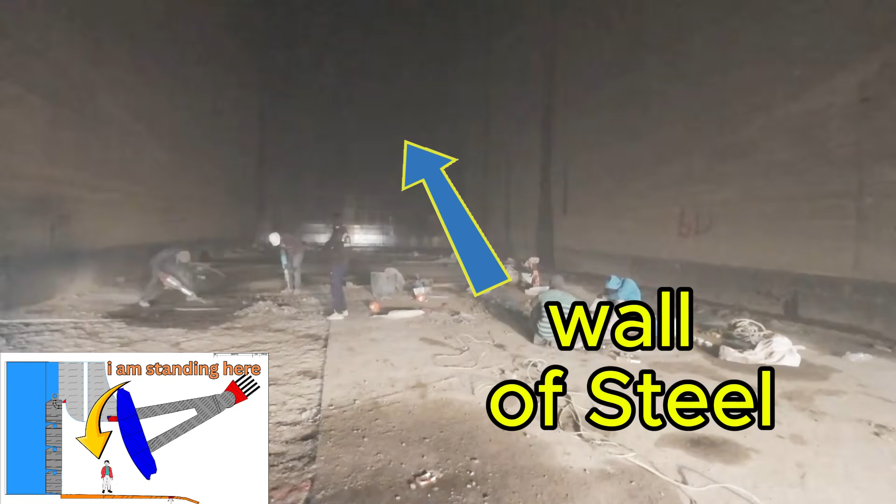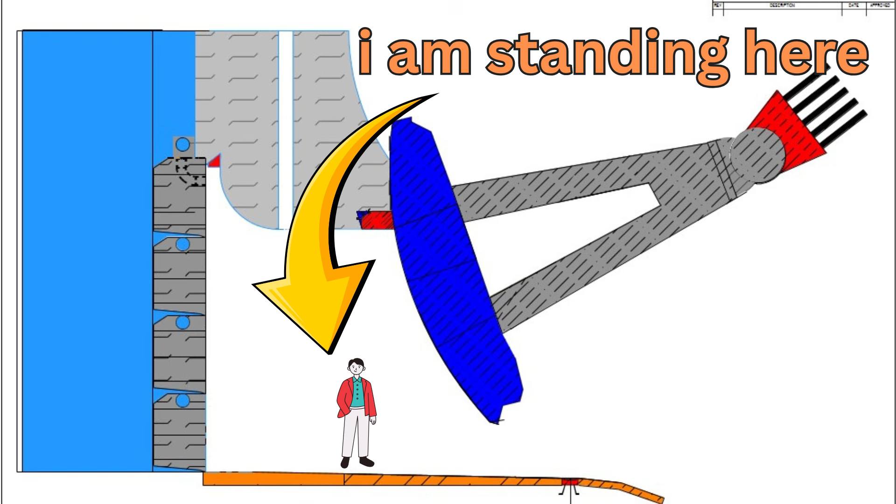Right now, this wall of steel is the only thing stopping millions of tons of water from crushing me. And if this wall fails, there will be no escape from here. I'm standing inside an area engineers intentionally designed to perform repair and maintenance on this massive gate.

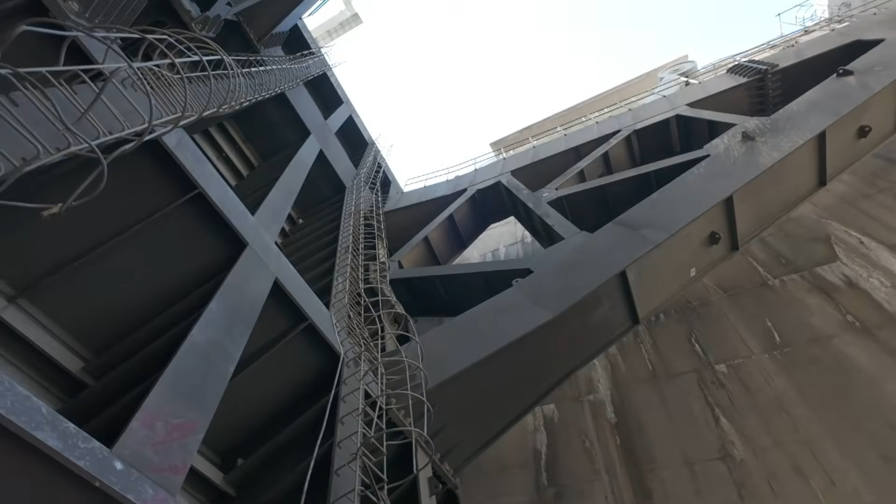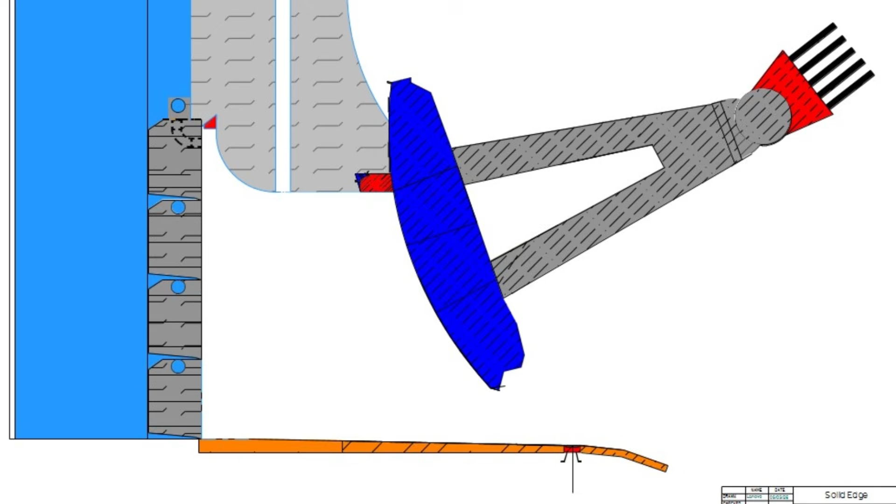While millions of tons of reservoir water press against a steel wall just meters away. Stick around until the end because you will see why, after installing these stop logs, engineers must open the radial gate just slightly to drain this area and prevent a dangerous vacuum from forming. During removal, the crane operator lifts only 10 millimeters first and then waits to fill this area before removal of the stop logs. Later in the video, I will explain the consequences of vacuum pressure.

These joined steel barriers are called stop logs. As you saw in my previous video, they are installed in front of the spillway gate whenever maintenance is required.

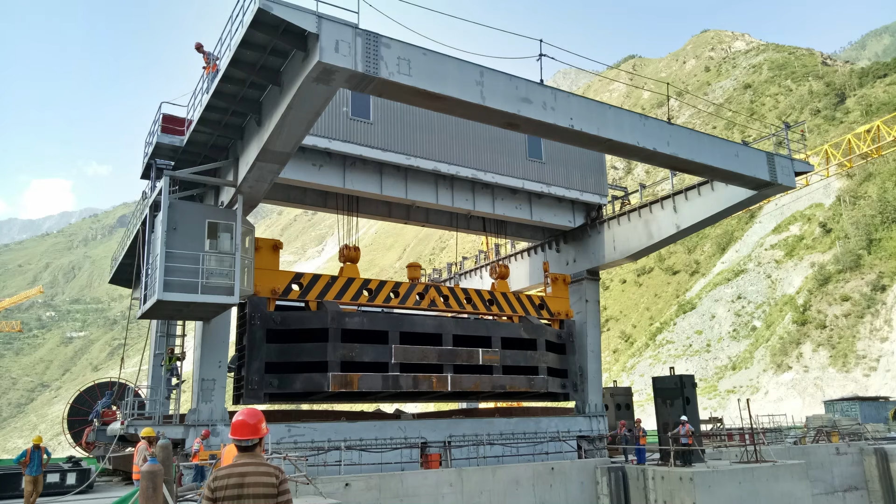So this is a picture I took during the commissioning of the stop log, just to give you an idea of how they move and sit in the slot.

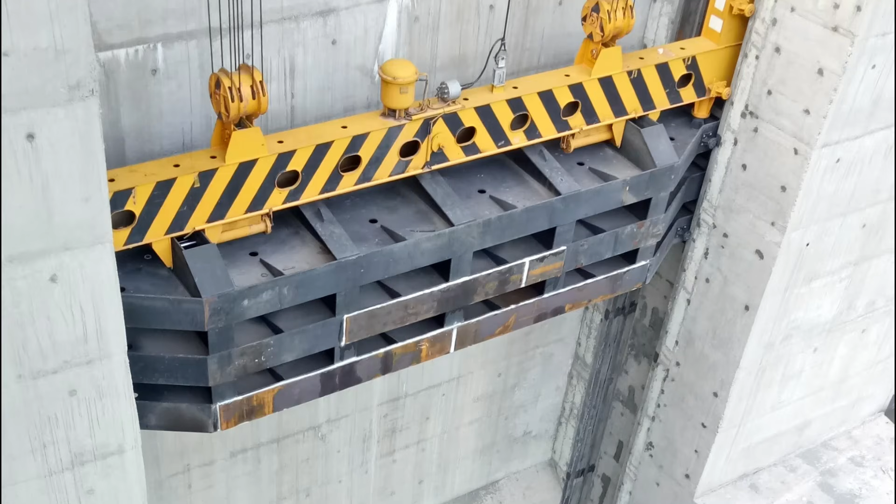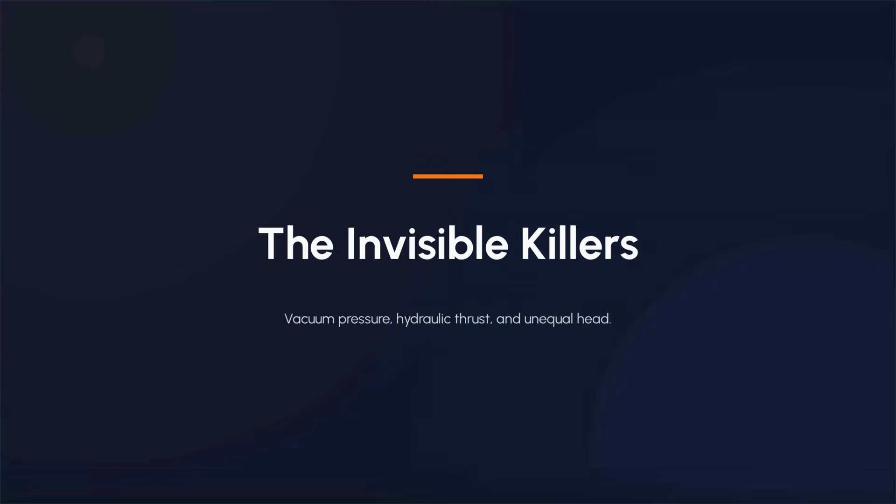At first, the process looks very simple: lower the steel sections, drain the area, do the repair. But in reality, there are invisible forces constantly trying to destroy everything. By invisible forces, I mean vacuum pressure, unequal water pressure, and hydraulic forces powerful enough to crush these massive steel sections like a soda can, or even damage the radial gate.

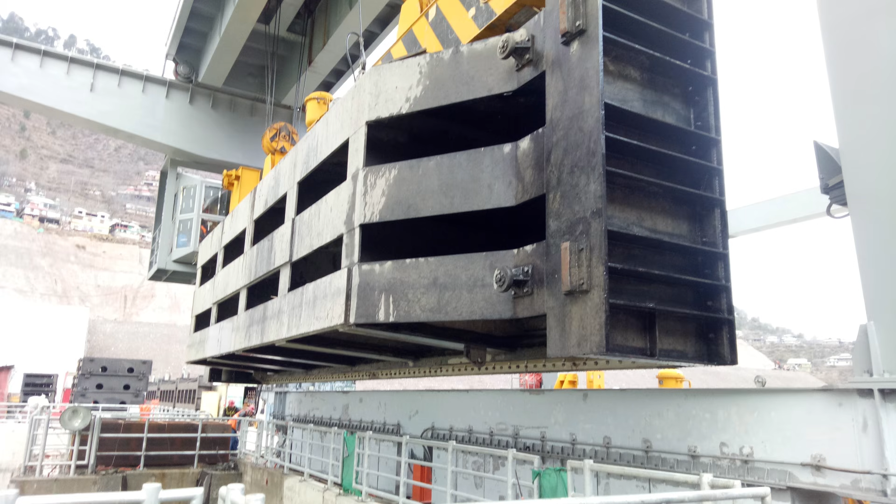If the process is not performed carefully, let me show you why. These massive stop log sections, each weighing nearly 60 tons, are lowered one by one into a narrow slot upstream of the gate. Once they are stacked, their rubber seals create a watertight barrier, and interestingly, the pressure of the reservoir actually helps compress the seal tighter against the steel.

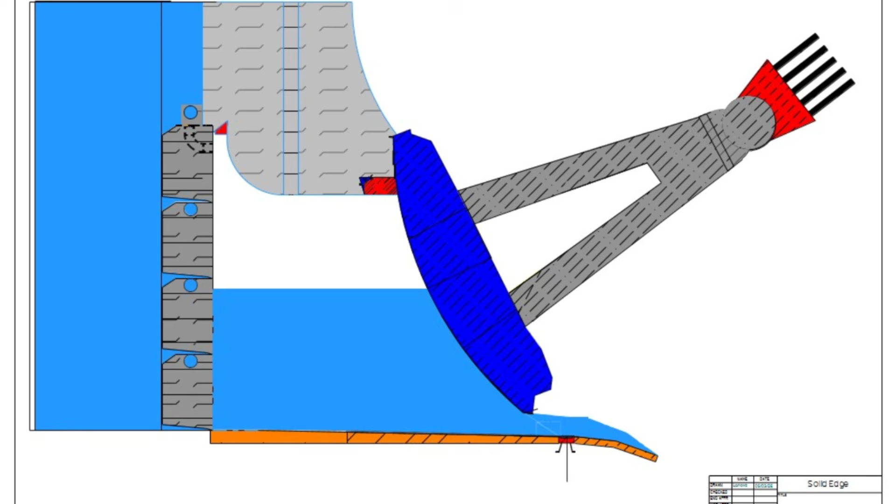But now comes the dangerous part: removing the water trapped between the stop logs and the gate. Because if engineers simply open the gate and drain the area too quickly, a vacuum could form inside this empty space, and that pressure difference can become incredibly powerful, strong enough to deform or damage the stop logs themselves.

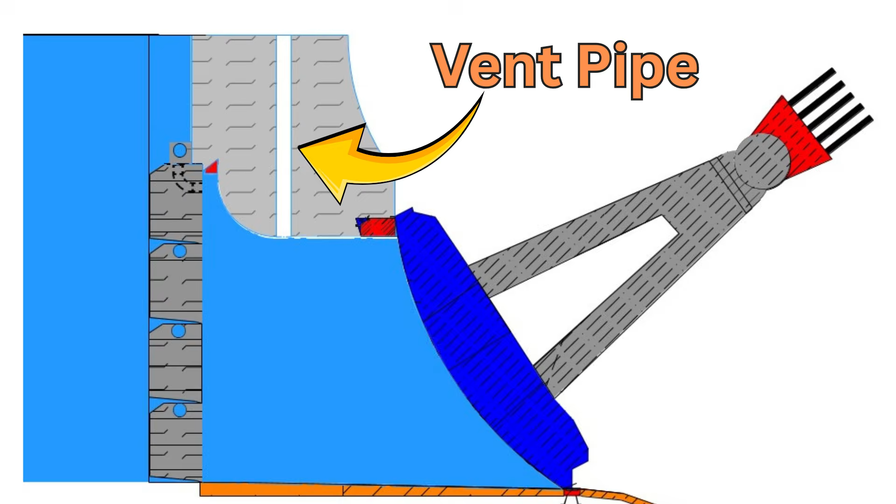To overcome this issue, a special aeration or vent pipe is connected to this chamber, as I have shown in the diagram. Once the operator slightly opens the radial gate, water slowly drains out while air enters through this vent pipe to replace the empty space.

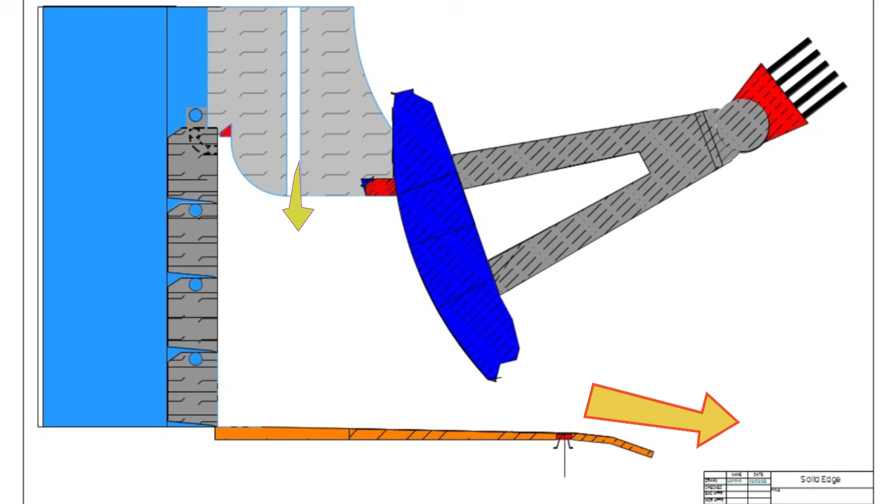This process is extremely slow and controlled. Sometimes it can take almost 12 hours just to drain this area safely. Once the chamber is empty, engineers inspect the stop logs carefully for leakages. If the leakage remains within safe limits, maintenance work can begin.

But if the leakage is excessive, the entire operation may need to be stopped and the stop log removed and reinstalled from the beginning. Surprisingly, removing these stop logs is even more dangerous than installing them, because after maintenance, the chamber behind the stop log is empty while the reservoir outside is still applying enormous pressure.

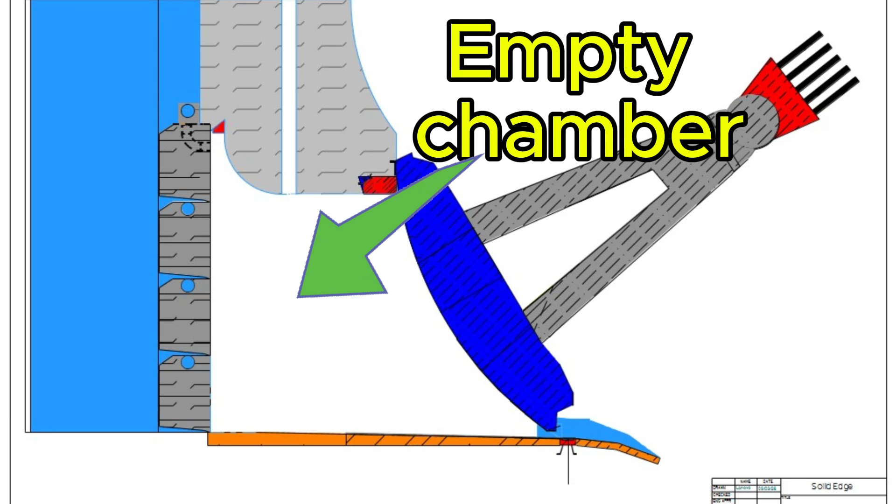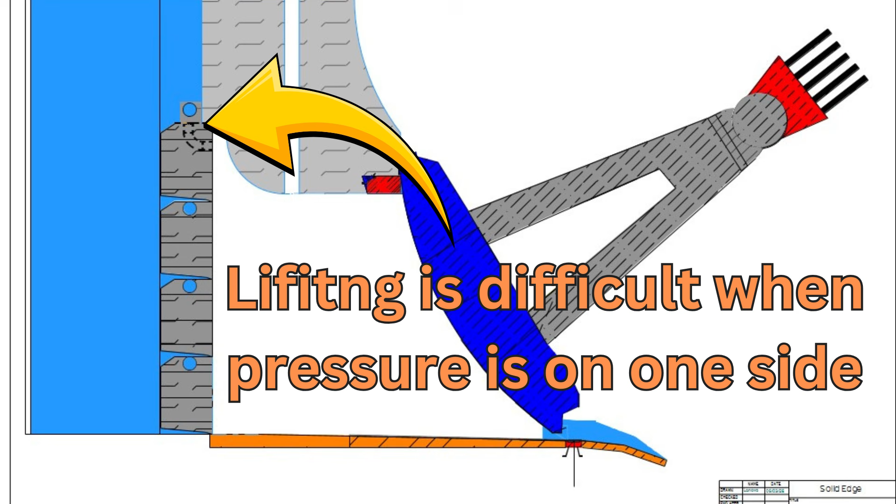If the crane operator tried to pull the stop logs out immediately, the pressure difference could create massive resistance. And if the stop log suddenly released somehow, millions of tons of water would violently rush into the empty chamber and slam against the radial gate. This sudden impact can create an effect similar to water hammer, capable of damaging the gate or even parts of the concrete structure.

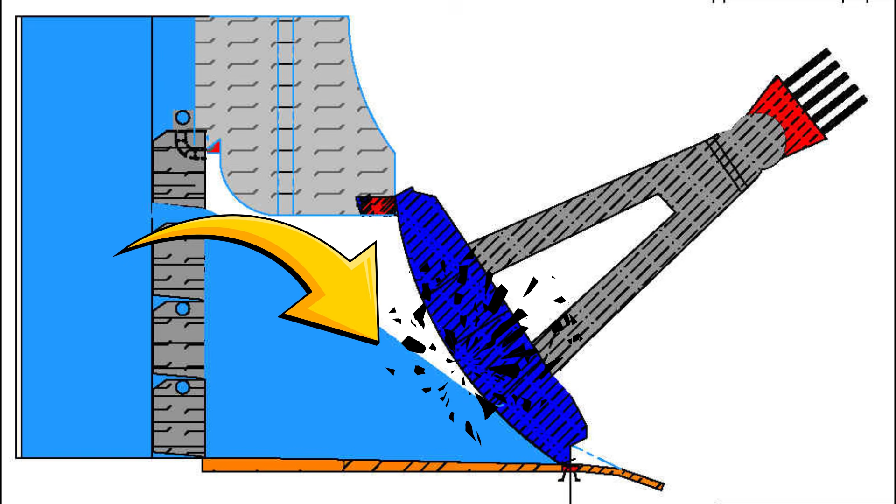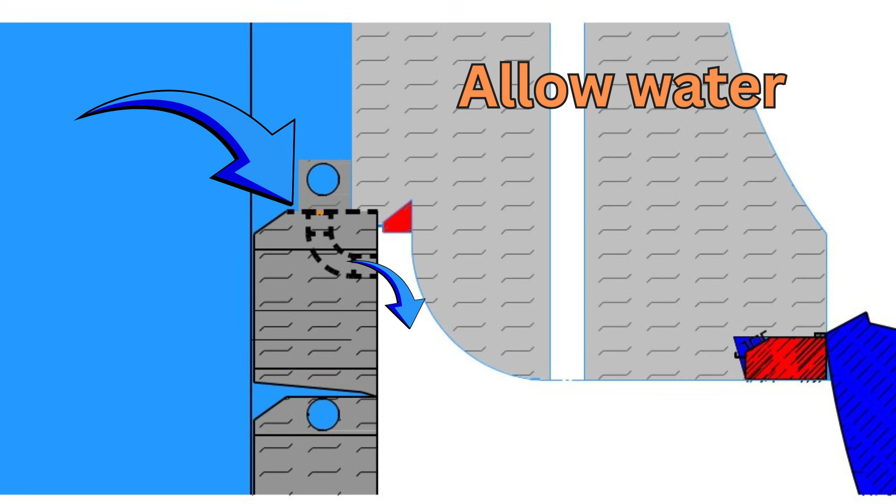That is why operators first lift the stop logs only by about 10 millimeters and then wait. During this tiny lift, a built-in bypass valve opens first, allowing water to slowly refill the chamber.

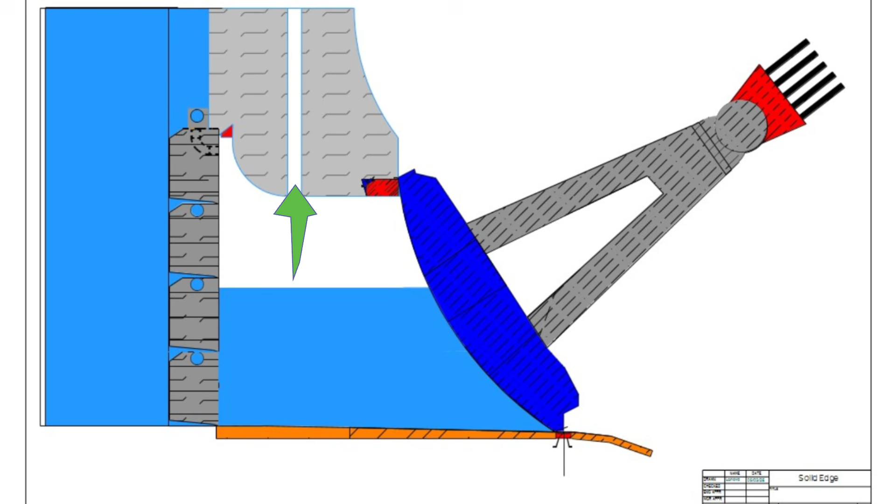When this valve opens, this chamber will start to fill and the trapped air escapes upward through these aeration pipes. I've personally been involved in this operation during my career, and although I have lost the original video, I still remember watching the vent pipe during filling.

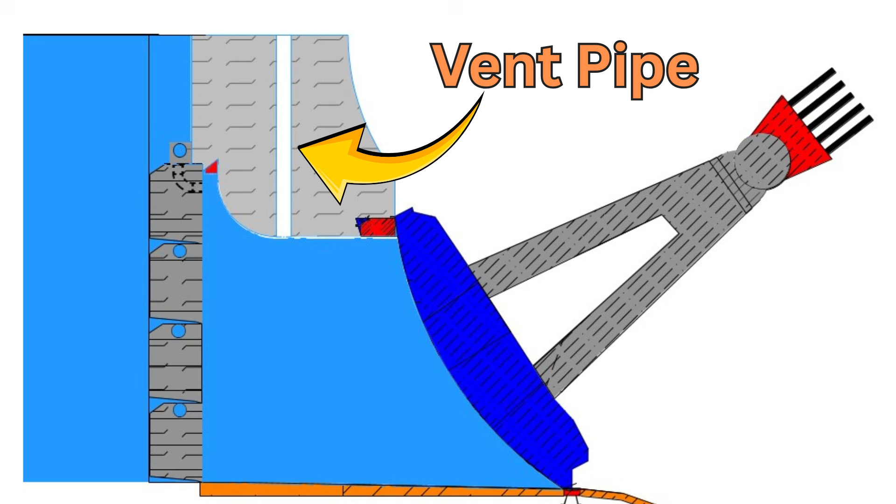The suction and airflow were enormous as compressed air mixed with the escaping water. The temperature dropped so much that the discharge became ice cold. In some cases, it can even create a snow-like mist around the outlet.

Once the chamber is completely refilled with water and pressure becomes balanced on both sides, the stop logs can be lifted safely one by one.